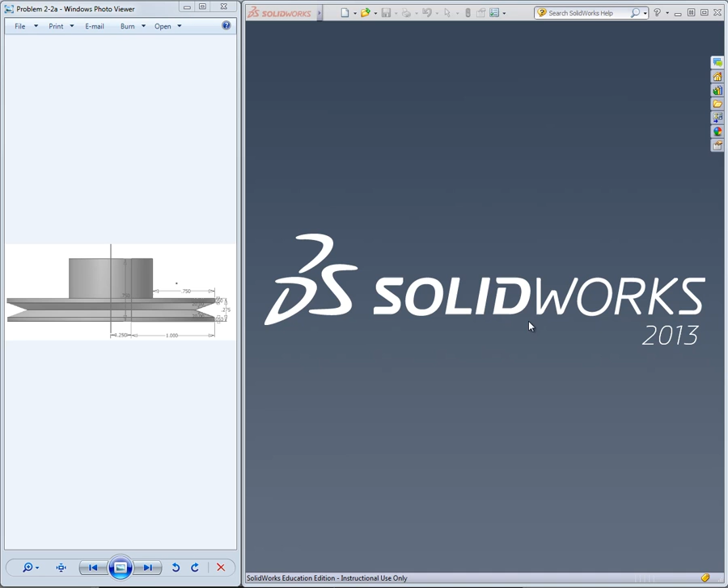So we'll left click on the little white piece of paper, left click on Part, left click on OK, left click on Sketch, left click on the sketch icon, and we'll left click on the front plane, then we'll right click, left click on Display Grid.

We'll left click on the line, and we're going to create an L shape with a V notched out of it. So we'll left click. We don't need to be quite that big because this part is actually kind of small. So we'll left click.

Make sure you lock these lines together, the two vertical lines, so that when we start dimensioning the pulley, the groove, the geometry will stay relatively intact. And we'll left click, right click, select.

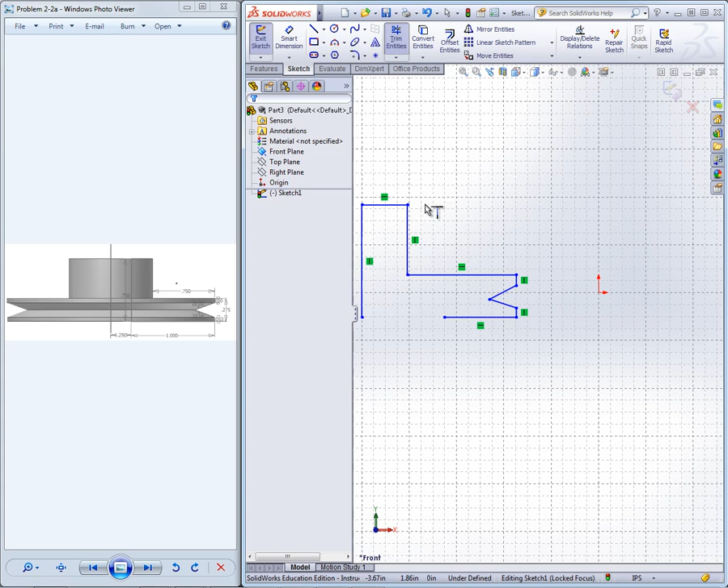I'm going to use the extend command because I can't have another line drawn here when one single line is what's really needed. So we'll drop the arrow down underneath trim entities and we'll left click on extend entities. Move our cursor towards the end of the line that we want to extend. Left click once, then we right click select.

And we'll dimension this using the Smart Dimension tool. We'll left click. This is supposed to be a 1, and the vertical is supposed to be 0.75. And we'll left click on the green check mark,

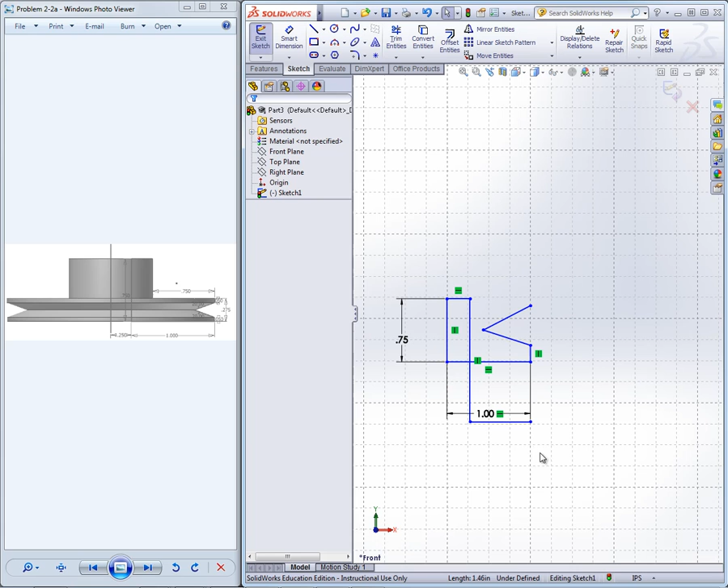and we'll move our line back, and somehow we've got a line here, so we'll have to do some repair work. This is supposed to be up, and that's supposed to be down, and I've inadvertently deleted a line that we still need.

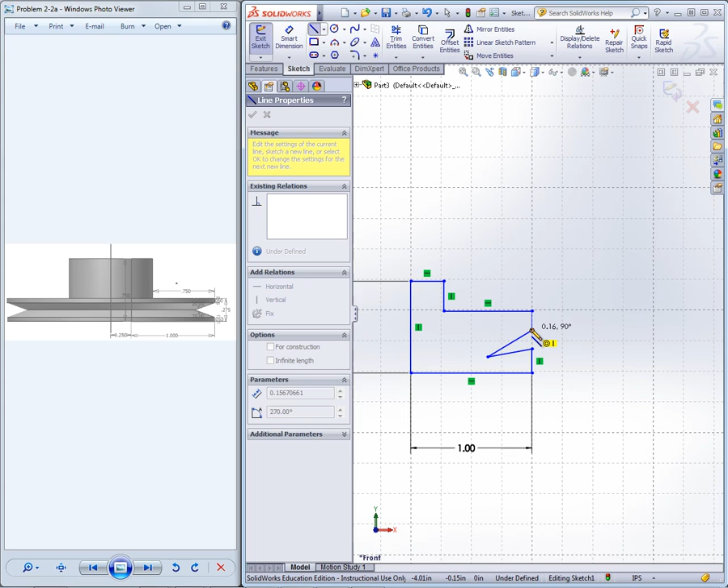So I'm going to left click on line command, put this line back in, and we'll dimension all of this very shortly. Okay, so we have a 1 for the overall, we have a 0.75 for the height. We left click on the green check mark, left click on Smart Dimension, and we'll enter 0.75.

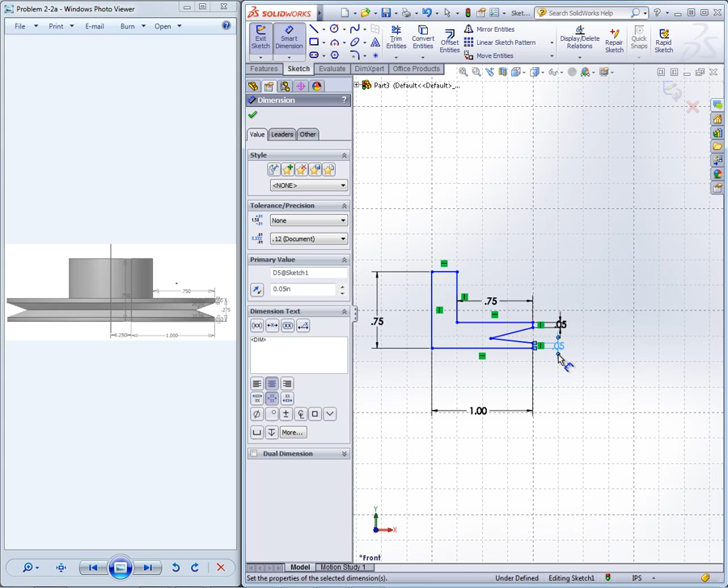Then we'll enter 0.050 for that distance, 0.050 for the corresponding distance. The overall thickness of the pulley itself is 0.275.

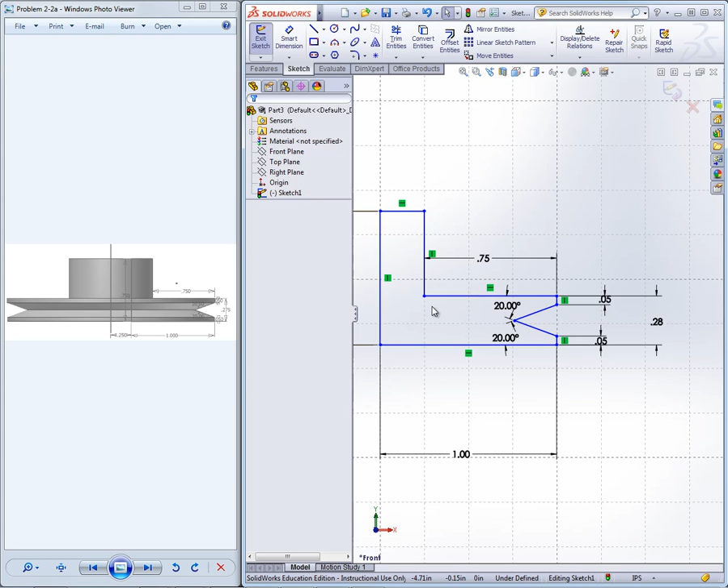Then we'll zoom in here, and we'll left click on each one of the parts that make up the groove, and we'll enter 20. And we'll hit enter, and left click on the green check mark, and we should have a sketch similar to what is shown at the left.

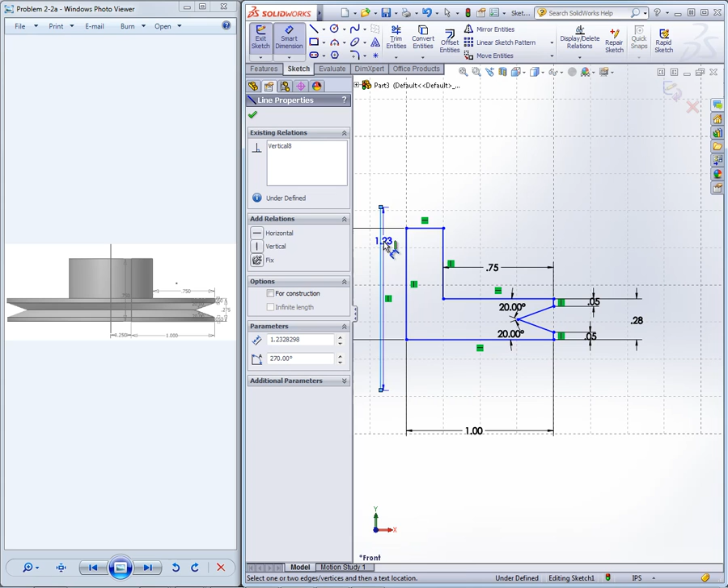Now we need to create a revolve line, and this can be done using a regular line. We'll left click, right click, left click on select, we'll left click on Smart Dimension, 0.25, left click on the green check mark, we'll right click, left click on exit sketch, and we'll wheel it out a little bit.

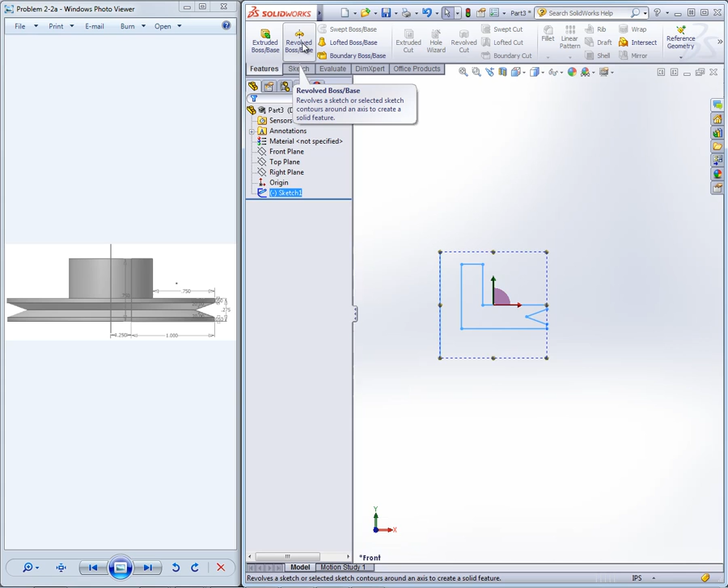Left click on the Features tab, left click on Revolved Boss Base, and then left click inside the axis box and left click on the axis. Then we'll move down to the Selected Contours box, we'll left click in there and then left click inside the profile, and we've got a nice preview.

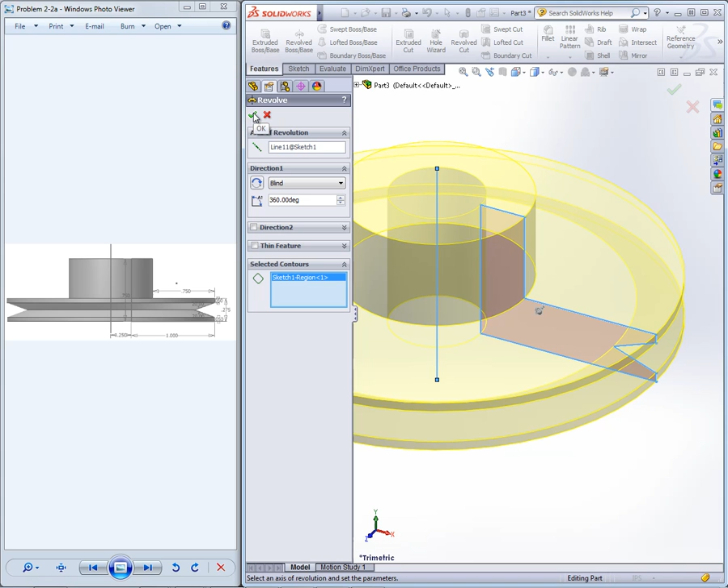Take the check out of thin feature so that it doesn't shell it. We want a solid. And we'll left click on the green check mark. We'll scroll out and left click out in the workspace and push the mouse wheel down and see that we've created a part very similar to what is shown using the revolve command.

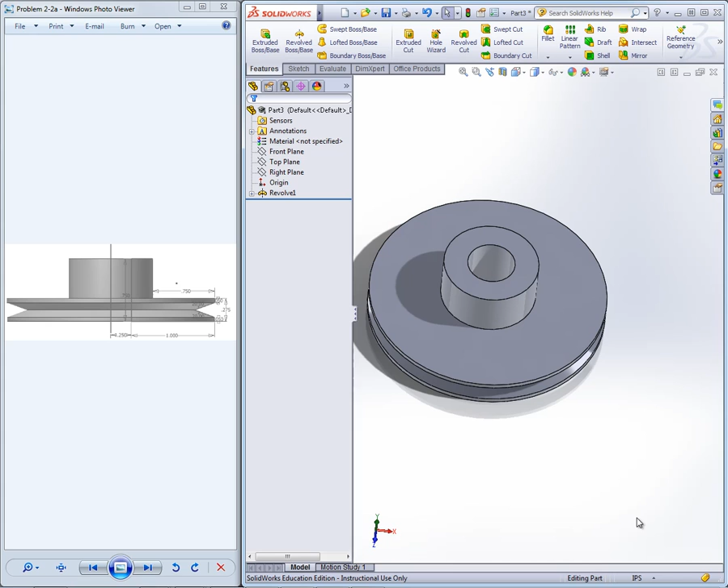And that concludes this module on how to create a simple part using the revolve command in SolidWorks.